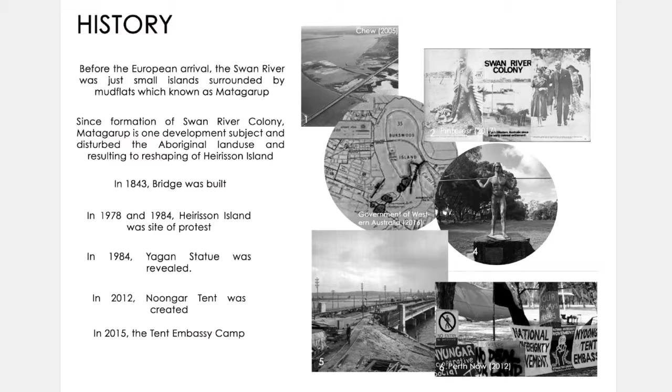In 1843, a tall bridge was constructed over the island and the mudflats close to the current location. This was the first bridge, and they rebuilt it in the 1860s. Next, when the mudflats were dredged to allow boats to travel upriver, the material was used to join the two islands together, creating a single island.

So in 1900, they dredged all the islands, combining or joining them together. Heirisson Island reached its current size by 1930, following further dredging of building rubble, sand, and soil.

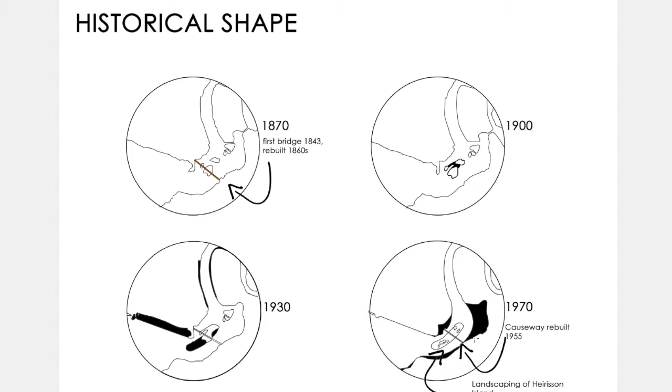The island remained undeveloped until major landscaping works in the late 1970s, which transformed it into its current parkland setting that supports low-impact recreational activities. In 1975, Heirisson Island was placed in the City of Perth as a Class A reserve. The bridge was rebuilt again in 1955, and this shows the landscaping of Heirisson Island.

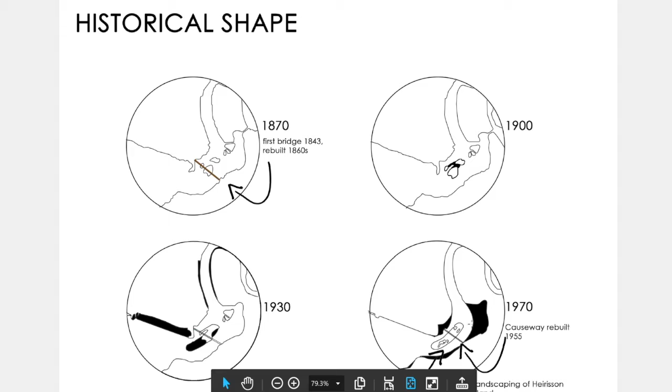Next, I'm going to talk about Yagan. Who doesn't know Yagan? Yagan was a Noongar leader, born circa 1795. He was also a resistance fighter during the early years of the Swan River colony. He was shot dead by settlers in July 1833 after a 30-pound bounty was placed on his head, because he had speared a number of Britons to death during the Noongar resistance to British claims over their land.

After he was killed, they cut off his head and skinned his back to obtain his tribal markings. His head was shipped to Britain to be studied and displayed in Liverpool, while his body was buried, and the head was returned to Perth in 1997.

Then Robert Hitchcock carved the Yagan statue, and it was erected on September 11, 1984. It is located on Heirisson Island, immediately to the east of the Perth CBD, a rather lonely and isolated place. This statue is bronze, nude, seems slightly larger than life size, and is a fine piece of craftsmanship.

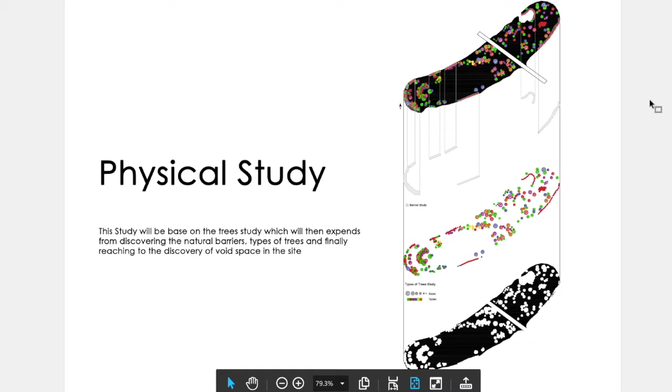Thank you, Laras. Now I will be talking about the physical study, to introduce it first. The main thing I want to talk about in the physical study is based on the trees, and later it will expand to the barriers and the void study.

In types of tree study, we categorize tree study according to the experience we felt visually, trying to categorize them by size and color, such as calmness, heaviness, and directions. You can see that most of the trees are dense in this vast area, and it will be explained in more detail in coming slides.

So in natural barriers, formed by groups of trees located along the side of Heirisson Island near the river, they try to block the view, which creates a sense of security and gives more. You can see there is more security in the west than in the east.

So here it's clear that there are only two parts, but in the west part you can see there are many barriers which block the view.

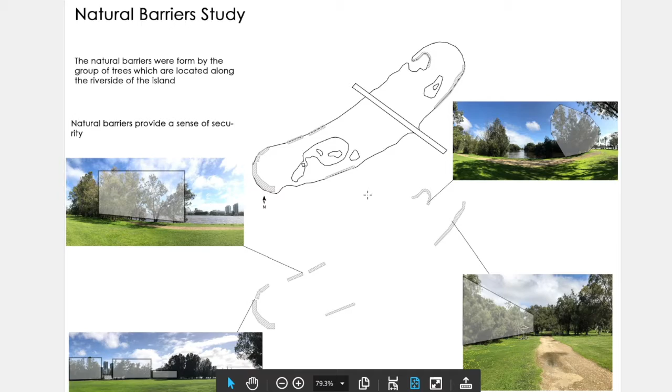And next we talk about the void. The void comes through the existence of the trees, because without the trees there would be a lot of void. But the void becomes clearly seen in the middle, and here this void has a sense of openness which gives us more fresh air and coolness in this area.

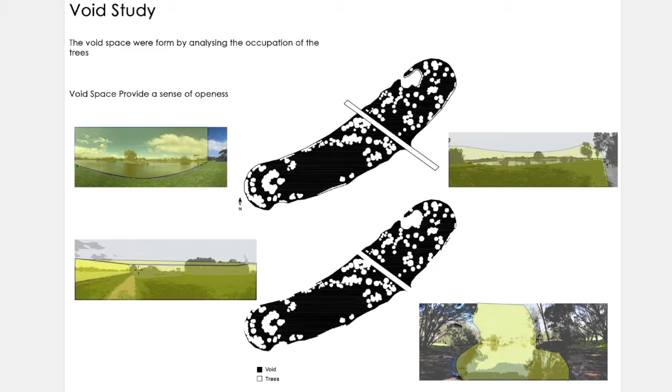You can also see in the document that there are voids highlighted in yellow here, also here too. This is near the lake, located around here, and it is also located beside the river, located near here. So now I'd like to continue to the land use study.

In the land use study, we classify the land use according to the density of trees and the sound study. So we classify them with natural sense and artificial sense, which will be further discussed in the next slides.

In tree density, we can firstly interestingly see that there is a swamp located here near the lake, on the west side of the island. When you look overall, you can see there are more dense trees located on the west side. For example, here you can see lots of trees and lots of trees here, but on the east side the trees are dispersed and very unorganized.

When you look to the sound, we now analyze the sound with the sensation that we got. There are five sounds: road and water, nature, wind, and bridge. The most occupying sound is the wind, because the wind is always blowing in every part. For example, this part of the wind is blowing near the river, so you can hear the voice here.

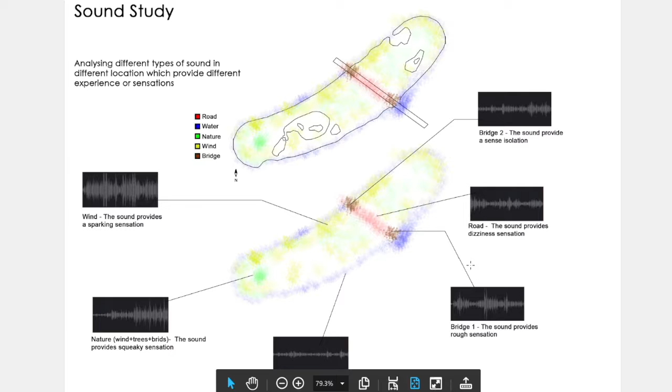However, if you look here, there's exploration, and you even have animals like wild duck and kangaroos. However, when you look at the artificial side, you can see mostly typical birds, which are like fishing around it.

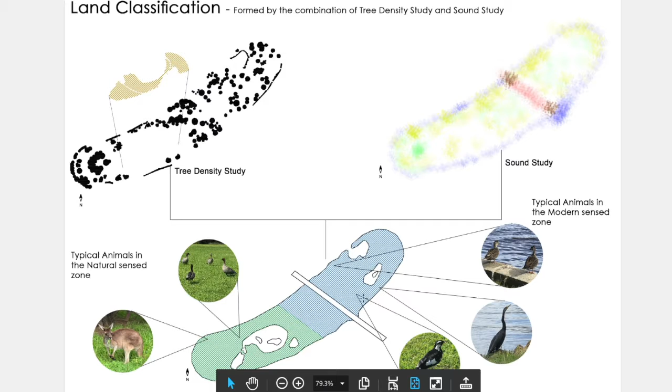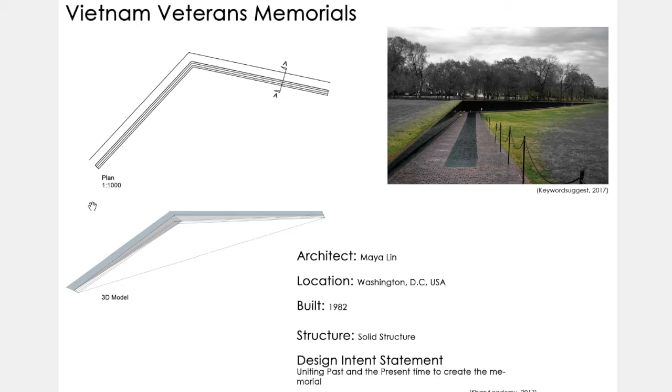The design statement of the structure is to unite past and present time to create the memorial. Moving on to the next page.

As you can see, there is only one primary structure, which is the ground, and there are also secondary structure elements, which are the granite walls and flooring - you can clearly see it in the perspective drawing.

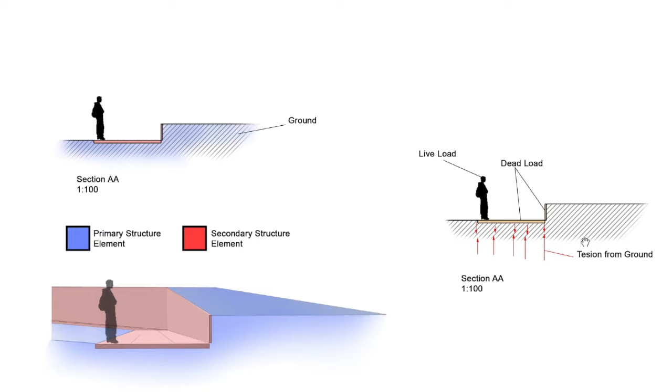To talk about loads and tension, there are two types of loads: human loads, or live loads, and dead loads from the granite walls and flooring. Analyzing the tension, it is natural, because tension is formed from the ground working against both loads on it.

Moving on to the next bridge. The next design is called the Brick Pit Ring, located in Sydney, New South Wales, Australia, and it was built in 2005 by Durbach Block Architects.

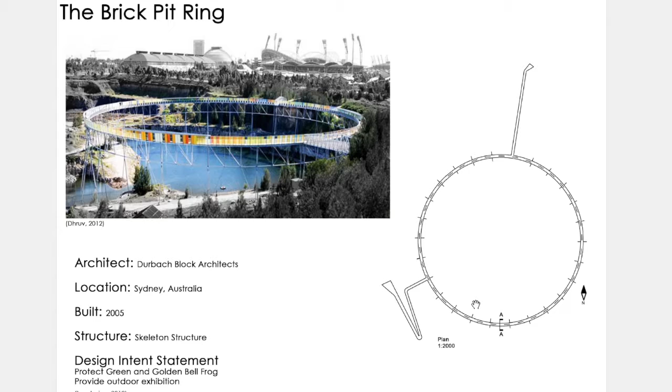Looking at these diagrams and pictures, you can clearly see the structure is a skeleton structure, and the main intention of the design is to protect green and golden bell frogs, which are endangered species living there, through providing an outdoor exhibition so people can see around the lake, while also protecting them.

From the perspective of load and tension, we can identify that high compression forces are located in this area.

Structurally, the bridge has two primary structures, highlighted in red, which you can clearly see in sections and perspective pictures. The secondary elements are highlighted in blue, and there are also tertiary elements, which are supported between them, highlighted in green.

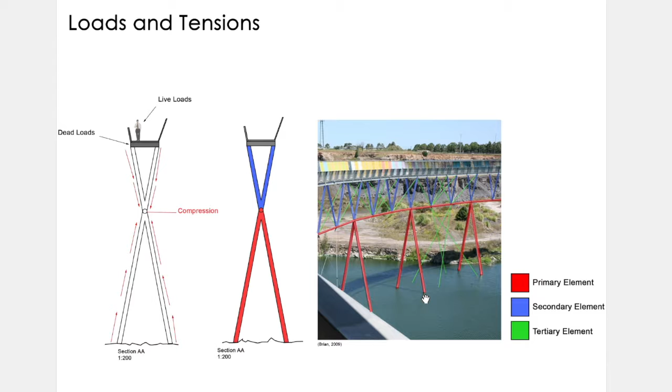Finally, the final bridge is Schanerloch Bridge, designed by Marte Marte Architekten, located in Dornbirn, Austria. It was built in 2005, and as you can clearly see in pictures and diagrams, it is the surface structure type, with the main idea of mimicking the frozen dynamic of the mountain road.

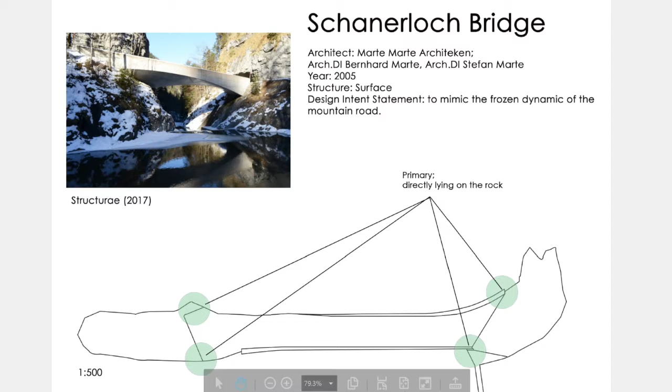Looking at the plans and drawings, the primary elements are directly laid on the rocks of the mountain. Moving on to the next page.